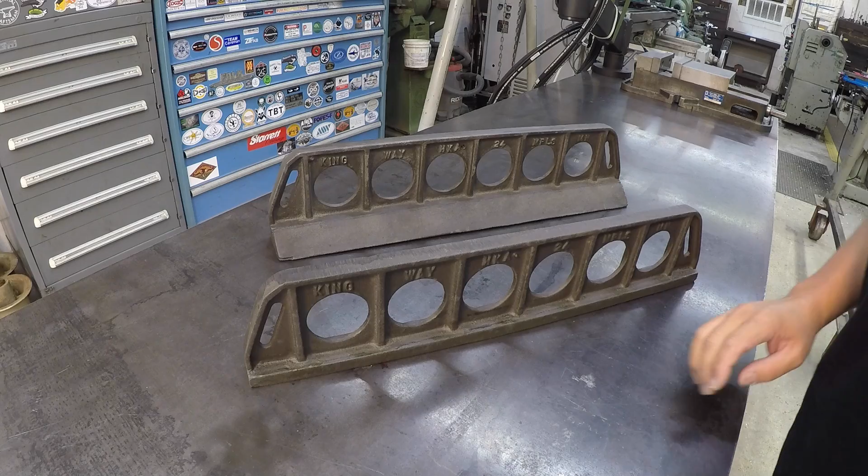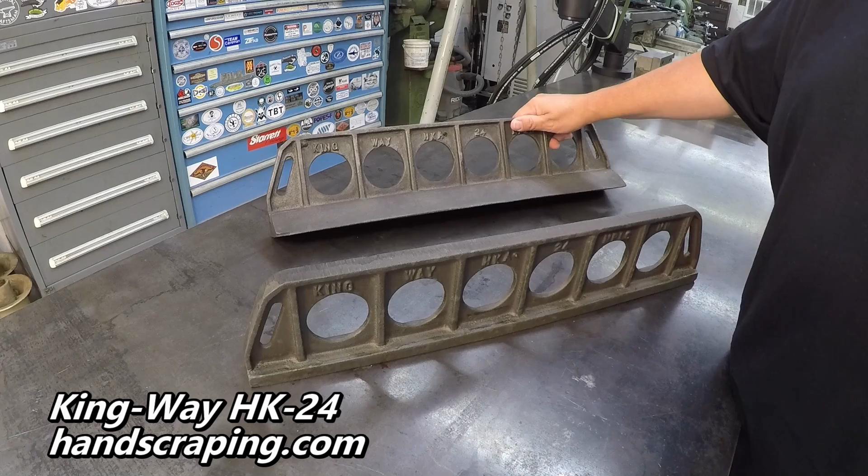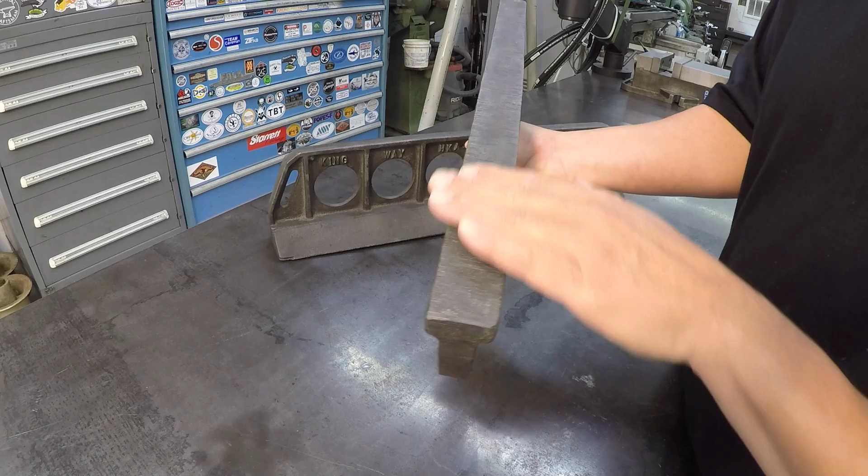Alright guys, today we're going to start machining one of our straight edges on the shaper, and we're going to start with this model right here, which would be the HK24. We're not going to do the one with the dovetail because I've got my tool head on the shaper trammed at perfectly 90 degrees up and down, and whenever we machine this one right here, I'm going to cut in both of the sides. So we'll do the top here, which will be actually the bottom. So we'll do this surface, and then we'll do these two side surfaces right there using the automatic down feed.

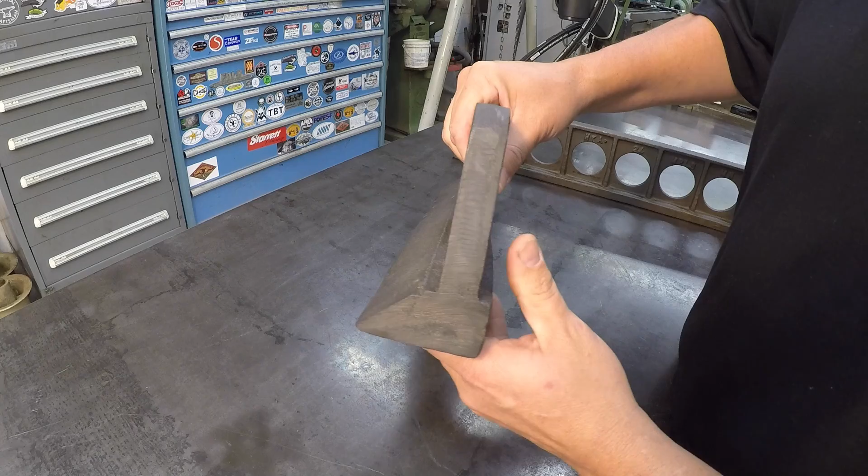So we'll do this one first, and then when we get this one completed, then I'll go to the HKA, which has the 45 degree dovetail right there. And then once we have this set up in the vise, we'll do this surface here, do this surface here, and then we'll move the tool head over at 45 degrees and cut this angle right there using the automatic down feed. All right, but this will be a separate video, and we're going to get started on this one.

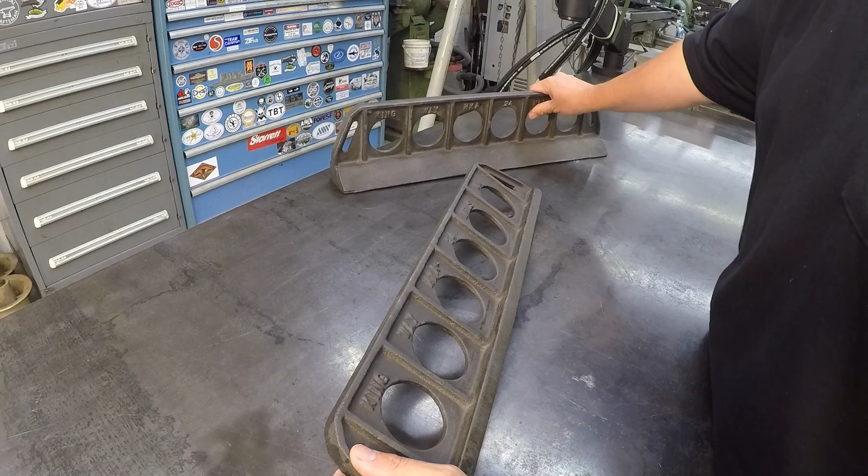The first thing we're going to do, the way that I want to do this, now I don't know if this is the preferred way or the right or the wrong way. I don't know. This is the way that I'm going to do it. These ribs right here are very, very close to being on a true plane. They did a good job with casting these. So I want to set this in the vise upside down to be able to do these surfaces here. But I want to be able to clamp this and not distort it, bend it whenever I'm clamping it.

So I'm going to start by cutting these ribs right here flat. I'm just going to clean them up. Not going to take a lot, but we're just going to clean them up so that they're machine true with each other, okay? And we'll do that first. Once we get both sides, we'll set it upside down in the vise, and then we'll do our main machine surface right there, okay? So let's go to the shaper. We got to tram in our vise, and then we'll start our cutting.

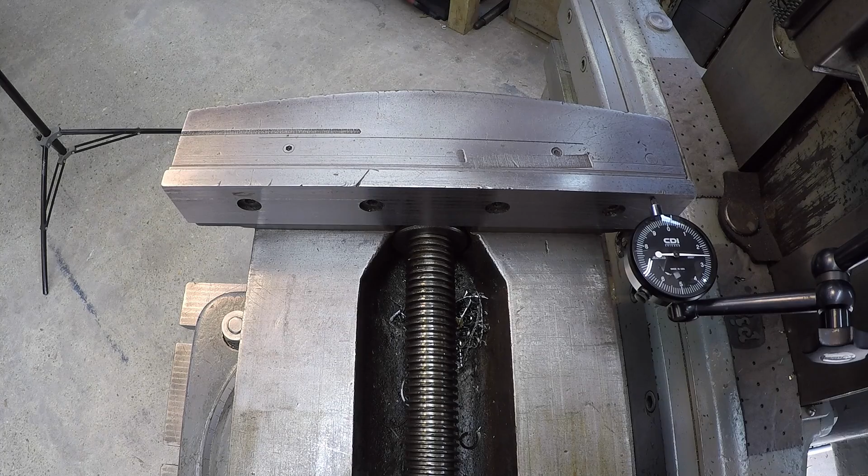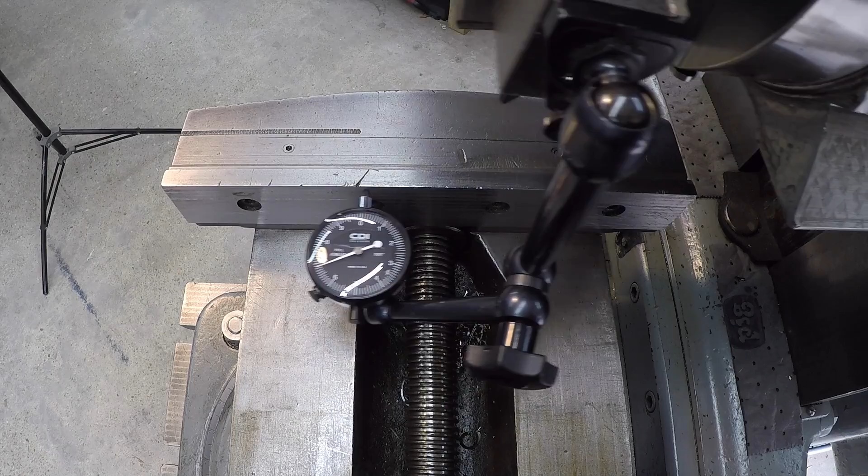All right, we're going to use our brand new Chicago dial indicator, test indicator, to tram in our vise. This wasn't trammed in last time I used it, so it'll be out a little bit. We got our Noga arm on here, and I'm going to use the fine adjust on the base here to get it adjusted up there close. I've already got the stroke preset there, so let's run her down and see what it's looking like. Looks like we got a good 5, almost 6 thousandths out.

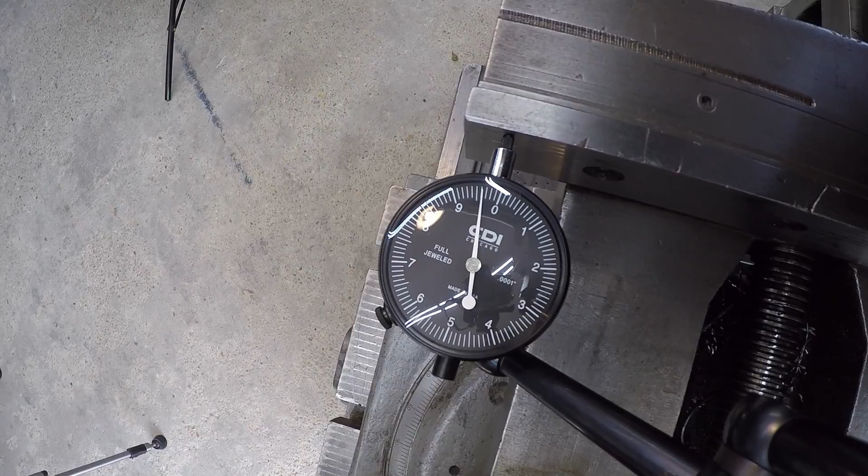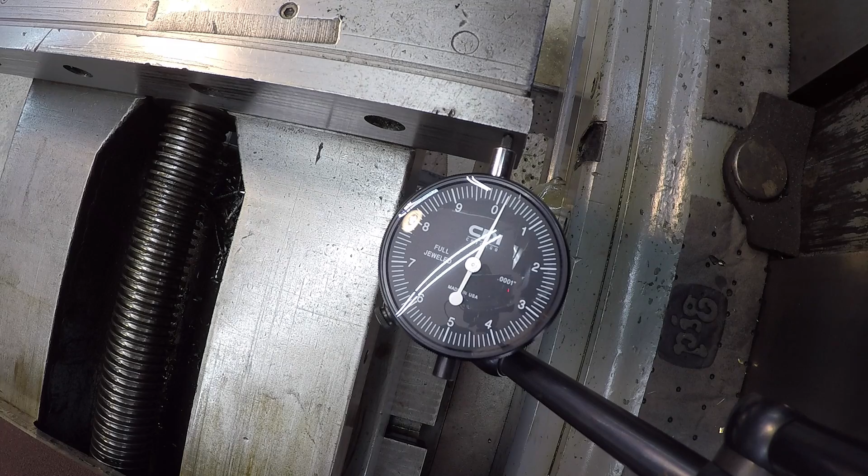You can tell the jaw isn't completely flat there. We got a little bit of a dip there in the middle of it. Looking pretty good though. We'll snug them down and see where it's at. All right. Looks like we're going to be within a half a thousandth from end to end right there, with a little bit of waviness in the middle of the jaw. So I'd say we're trammed in good enough for where we need to be. So ready to start setting it up.

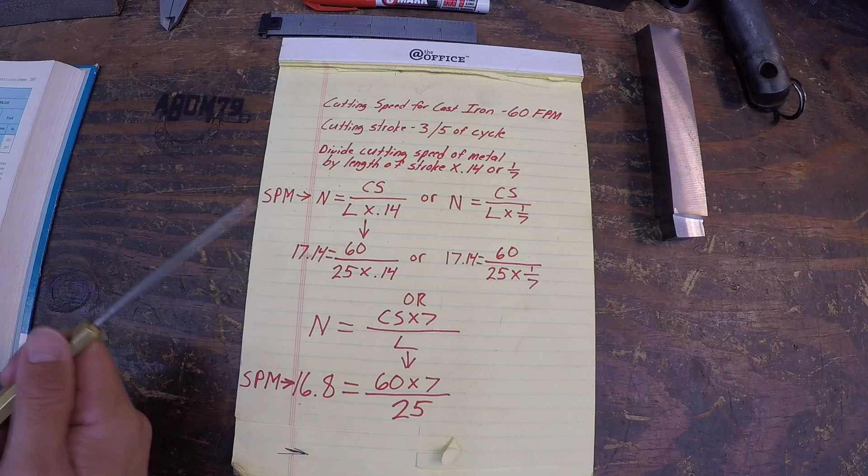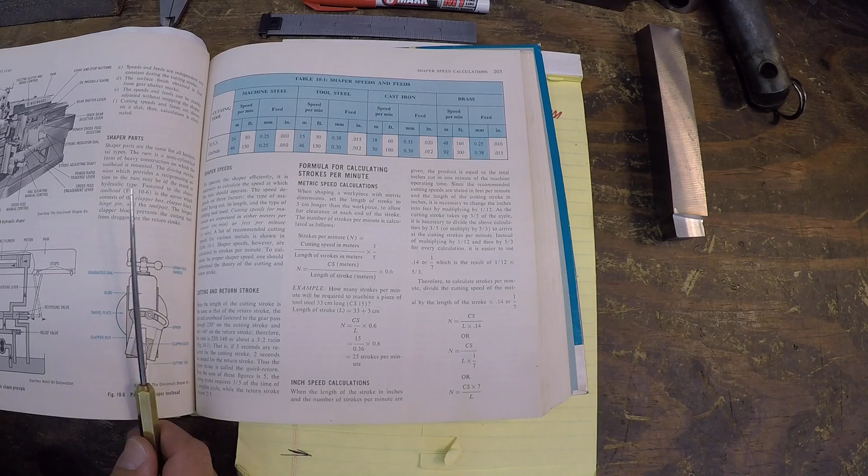I wanted to show you guys how I come up with the proper feed that we're going to be using to be cutting this cast iron, which is going to be 17 strokes a minute right here, okay? And this is the formula. I just went ahead and wrote it out so it's a little bit easier to see on camera. And this is all stuff that I'm getting straight out of my book right here, okay? This chapter goes over shapers. And, I'm sorry, not feeds, but the cutting speeds for shapers are actually given in strokes per minute.

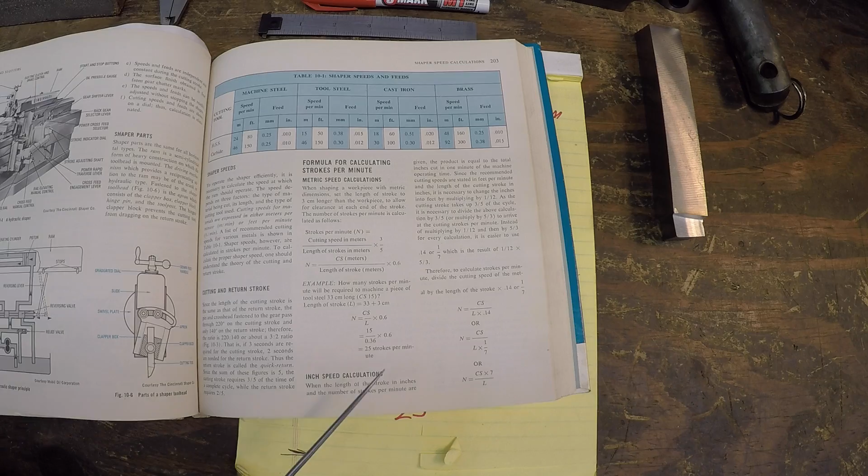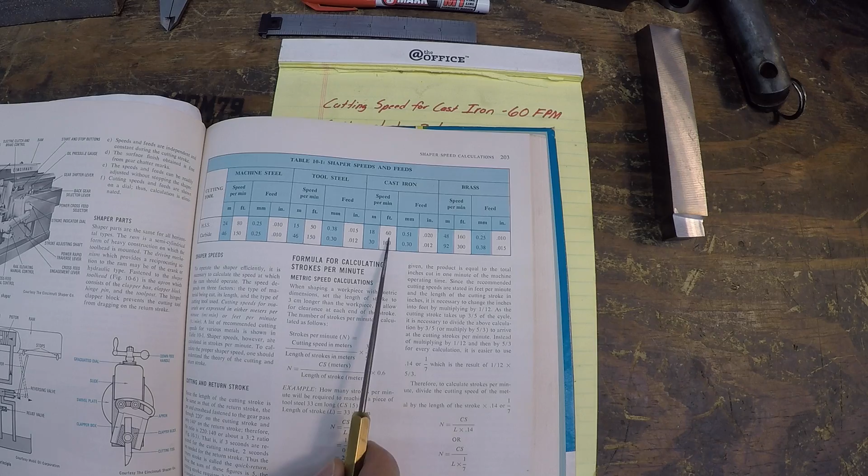Okay, so this chart right here gives you your shaper speeds and feeds in feet per minute. So we're going to be cutting cast iron, so it recommends a surface speed of 60 feet per minute using a high-speed steel. All right, so 60 is our known right there. We know that 60 feet per minute. And we also know that our cutting length is going to be 25 inches because we want a little bit extra length for our overhang, for our return stroke, whenever we go past our workpiece there.

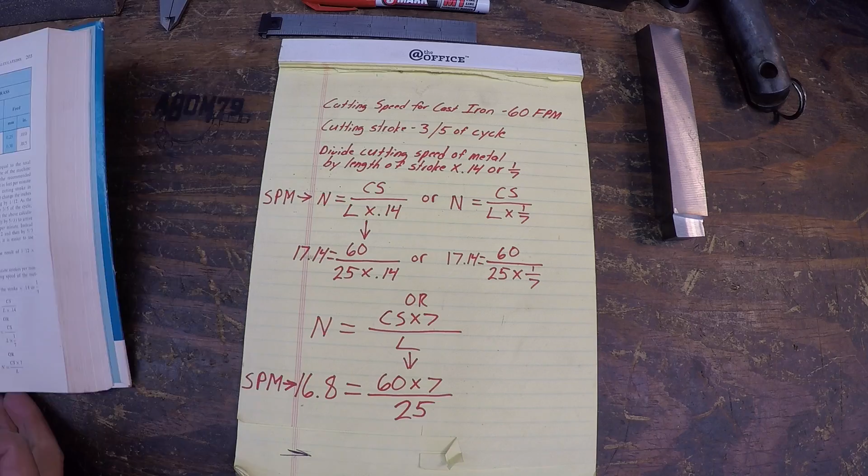So for a shaper, you have to convert it, and it all explains it in this right here. You have to convert it from feet per minute to inches per minute. And the other thing you have to remember is your cutting stroke for a shaper is only 3/5 of the cycle. So part of this formula is breaking that down into inches per minute and then 3/5 of the cycle. All right, so this is the formula right here, and it's just giving you the example. So your cutting speed is divided by your length times 0.14.

This right here just shows you the same thing. Cutting speed divided by length times 1 divided by 7. 1 divided by 7 being the same thing right here, 0.14. Okay, so if you drop down here, you see that gives you your total. 17.14 would be your strokes per minute if you use this formula right here to get your proper strokes per minute.

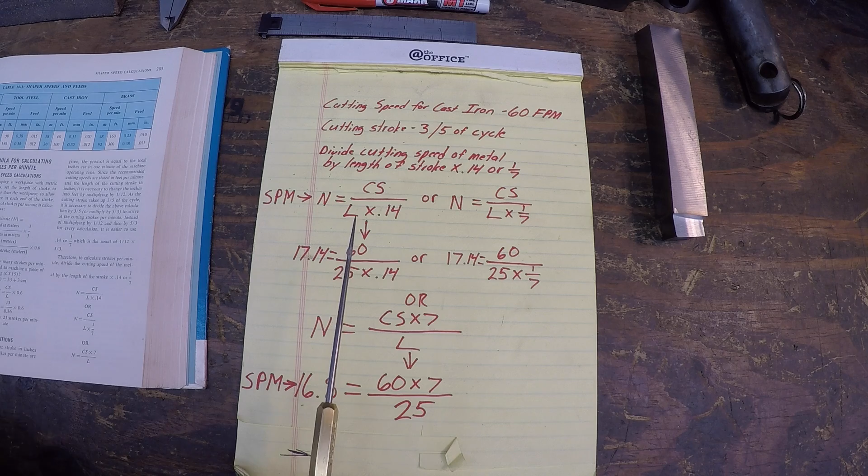Okay, to further simplify the formula to figure out what your strokes per minute would be, instead of using the length times 0.14 on the formula here, if you'll just go cutting speed times 7 divided by the length of your stroke, which in our case is going to be 25, that'll give you your strokes per minute. And you see how close that is. 17.14, 16.8. You round that off, you're at 17 strokes a minute.

So this is the easiest formula to remember for your shaper right there, is your feet per minute for your given material, whichever that's going to be. In our case it's going to be cast iron at 60. So your feet per minute times 7 divided by your stroke length will give you your strokes per minute.

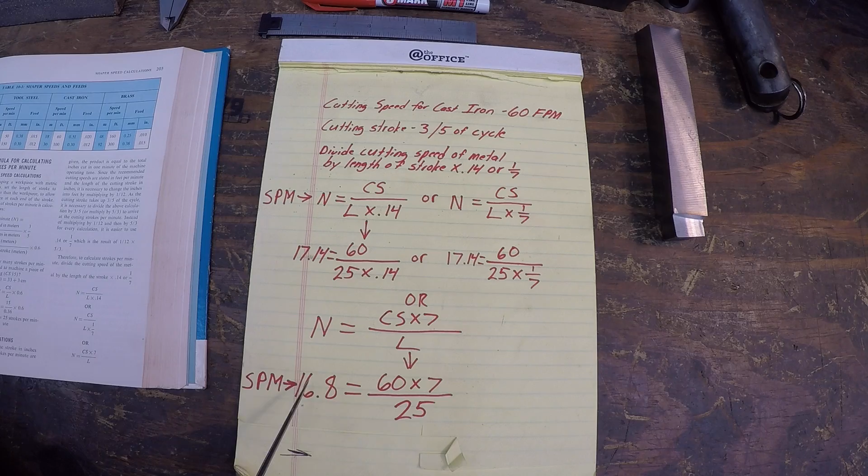All right, all that can be found right here, and this is my favorite book, Technology of Machine Tools. But there's several books out there that have really good chapters on shapers and planers, and it gives you all the formulas right here that you need to know.

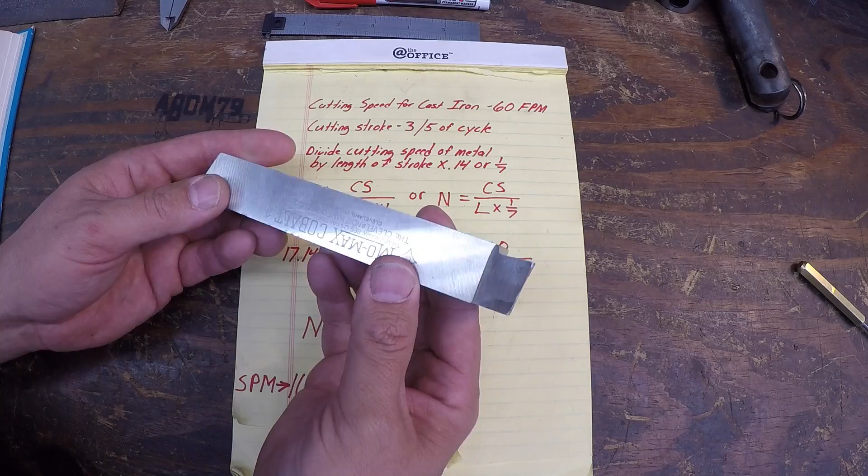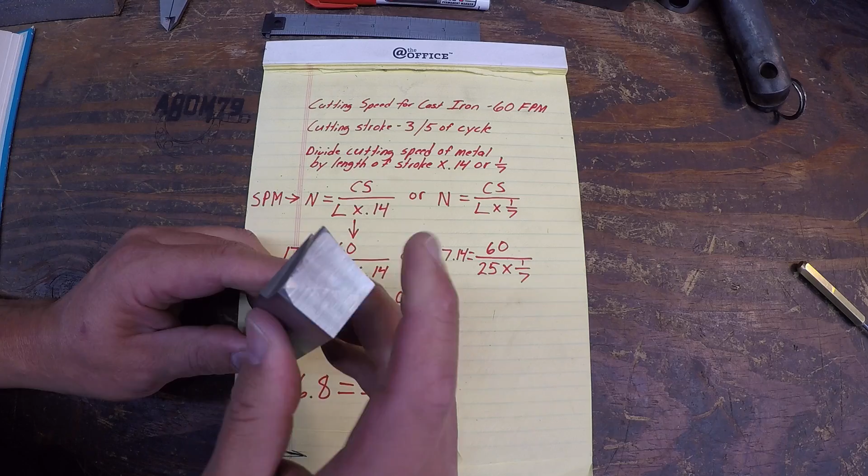While I got you here, I'll show you the tool bit that we're going to be using to make the cut. I've already touched it up. This is a piece of Mo-Max Cobalt 1-inch square, and I did touch it up on the grinder, touched the top of it, and I've rehoned it on my tri-stone over there. We got a nice sharply honed radius and cutting edge, and I changed up the angle so that I can position the tool so that our cutting edge here is 90 degrees to the direction of feed right there.

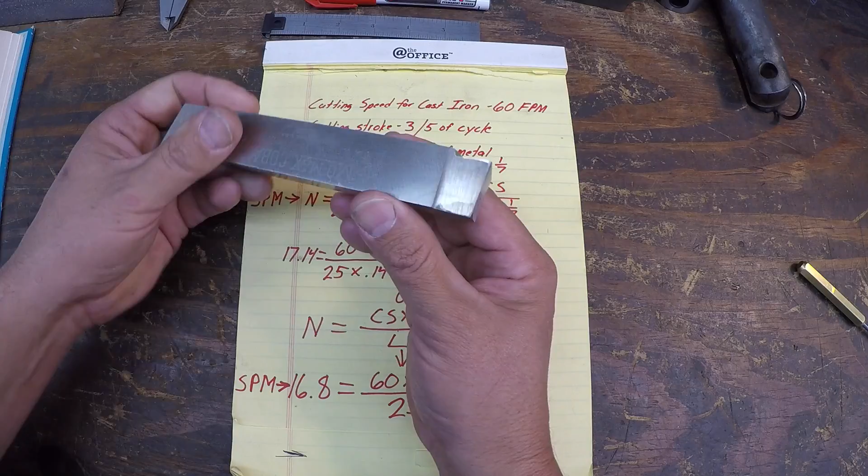I've been working on getting the vise set up here, and let me explain my setup. I've got my sandpaper here, my emery cloth, taped to each side of the jaws right here, and this is providing the best way to hold this rough casting in there. While setting this up, I've already tried the little bar, or let's say welding rod, aluminum bar on one side, and any other way that I've tried to set this up, even with a little ball bearing that I can put in there that applies pressure just to one point.

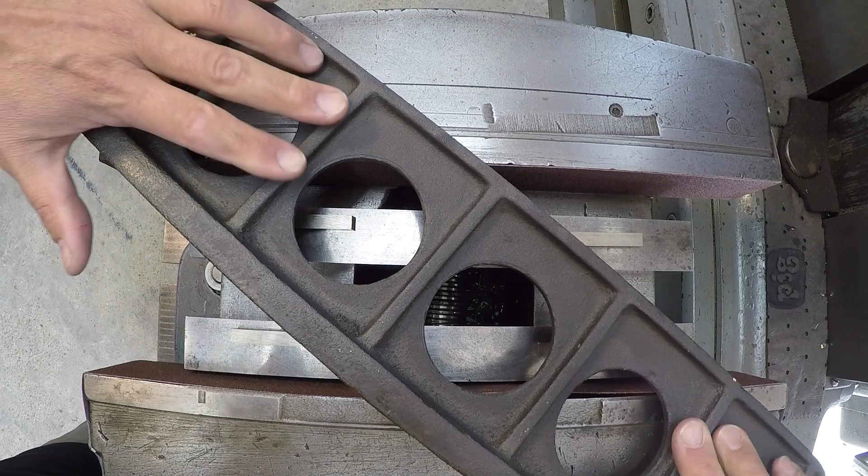Any other way I've done it has tried to kick it up whenever I tighten the jaws up, and I want it to stay flat on these ribs here. When I lay it down, I want it to be flat on the ribs because these are all in the same plane right there. I don't want it to kick one way or the other. And then of course these sides are not very flat. So this technique always works really well for rough castings, just taping it in there.

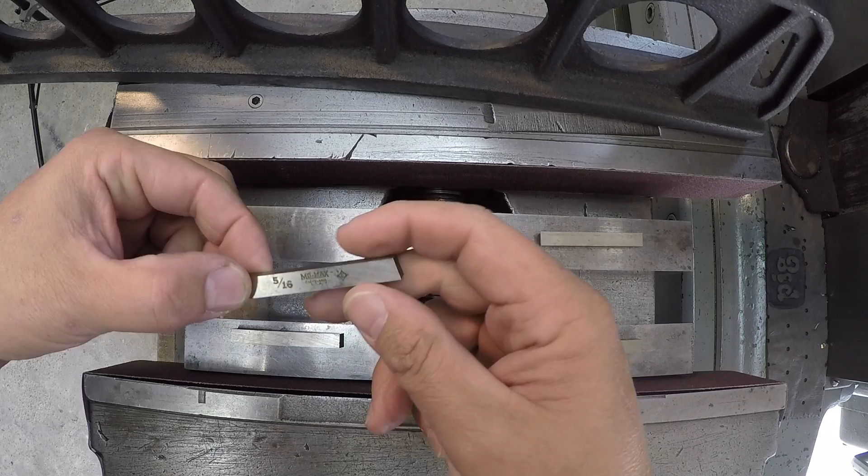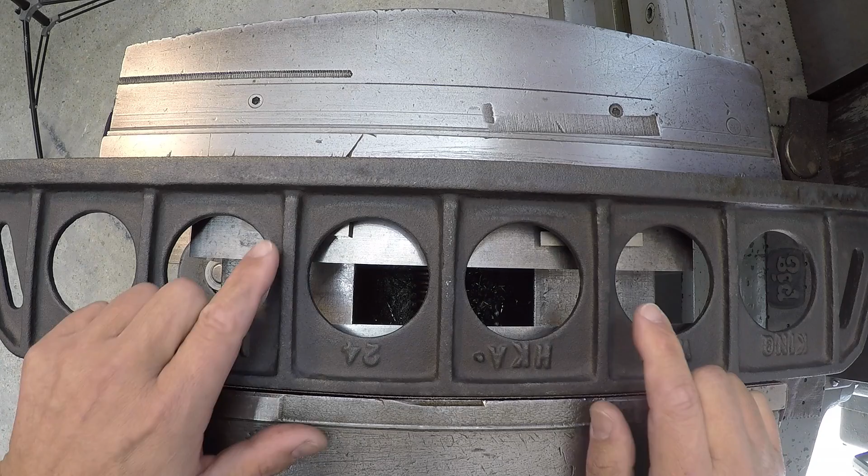So I got two parallels, and these are 5/16 tool bits, and I've mic'd these, and all four of these are within a 1/2 thousandth of being the same height. So that's going to be good enough for what we're doing right here with this piece of cast iron. So I've got them all ready to go. So let's set this down in there where I had it evenly. We're just kind of eyeballing these holes right here, even with the end of the vise. And so we're setting on these ribs right here.

All right, and I've got it up just enough now so that we can come across here and cut, and we'll come all the way over to right in here. All right, so once we tighten this up, I'm snugging it up now. Once I snug that up, it's not twisting the straight edge. It's not kicking it one way or the other. It's still flat on all four of the tool bits there in the parallels. There's a shot from down there so you can kind of see what I'm talking about.

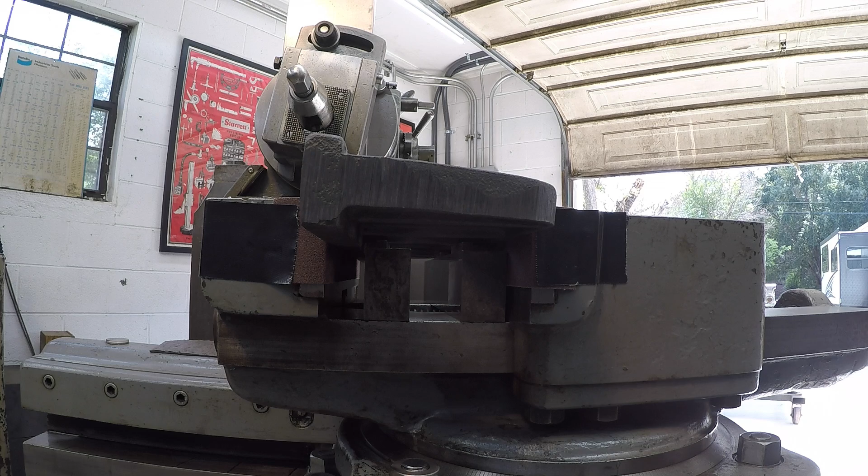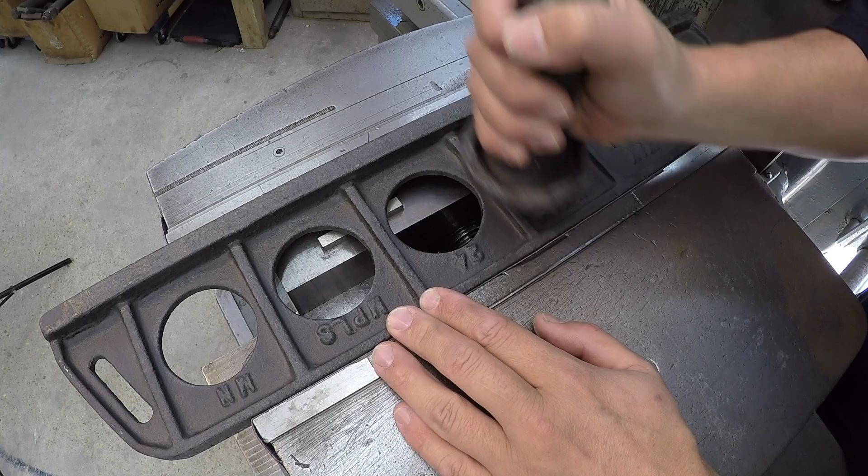It's snugged up, but I will take my lead and just gently tap it so that it is seated down there. Yep. No need hitting in the back. It tries to kick it up some, so just tapping the front, just making sure that it's seated on all four of the tool bits there.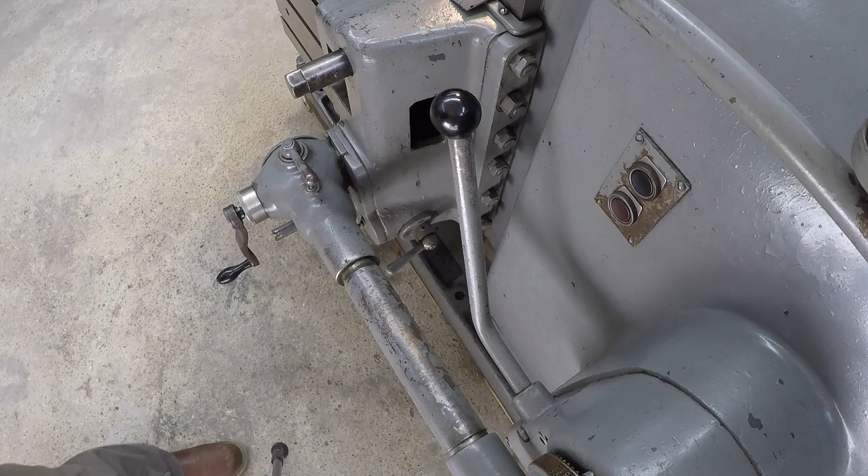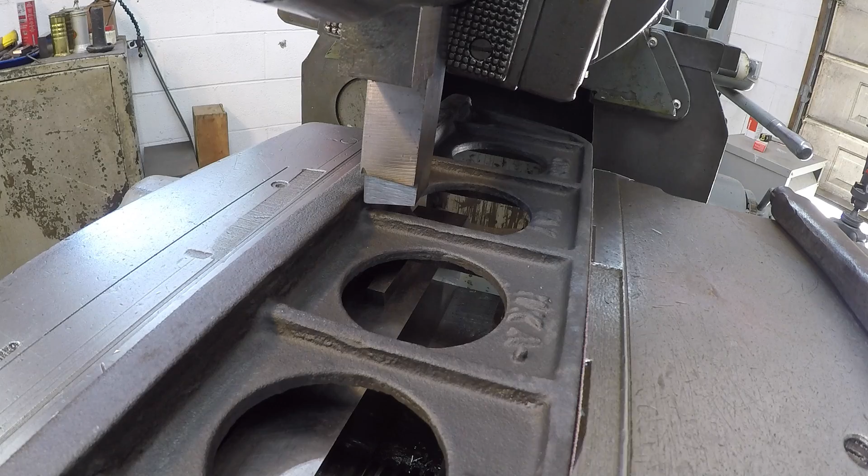I'm just getting my tool set here to the angle of this area right here. I don't know if I'm going to be cutting into that. It might just come right up next to it, but I wanted to get it lined up anyway. So I just brought it over right up against it, and I'm just looking down this right here, and the edge of that tool bit is lined right up on it. Okay, so we should be good to go there.

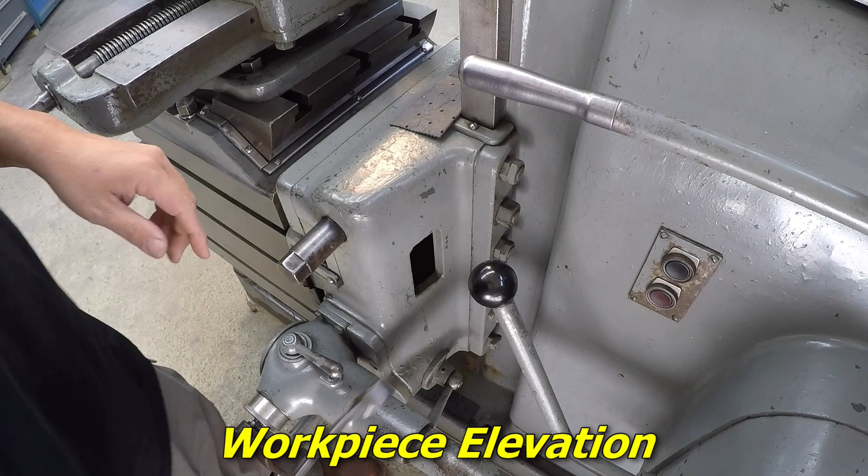Just got to tighten my lantern good. Once you get your tool set where you want, you always got to remember to tighten the table here, and the support on the front as well. You got this one right here, but this one doesn't. On my shaper, you see how it just spins? It'll tighten up, but I believe the cam is worn out. It never really gets fully tight. So I have to go around the other side and actually tighten the nut over there to tighten up this way.

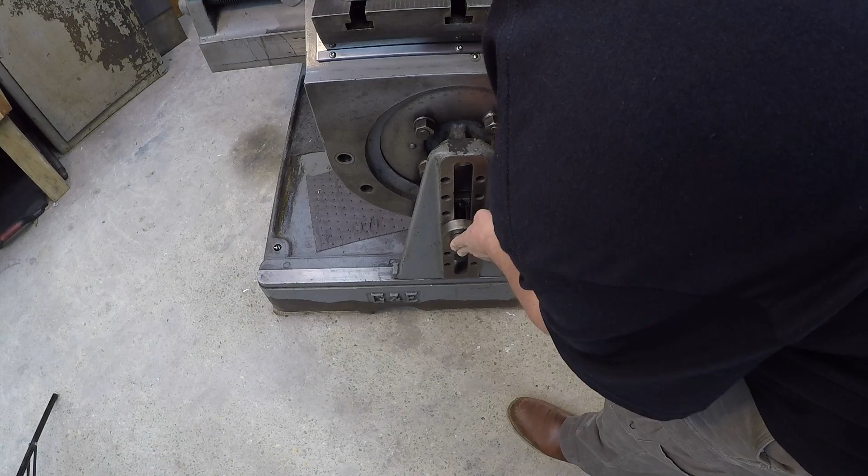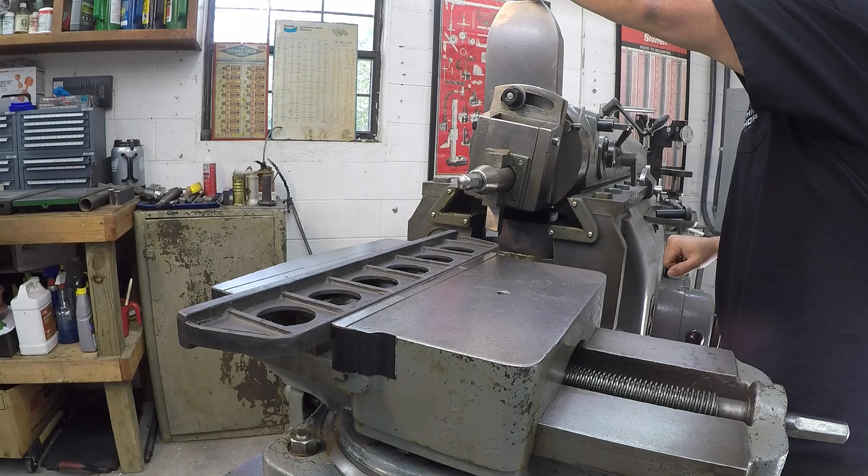I know that looks really close there, but I do have clearance, so we'll miss it. Trying to get them all evenly cutting, touching all except for here. Just taking 2 thousandths a pass here. I was hoping maybe we could get it in one cut. Go ahead and come across it with it right there.

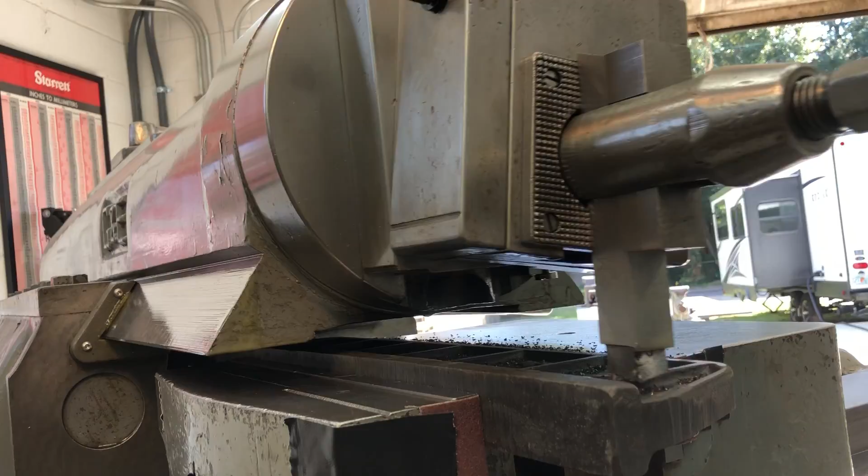Just gonna try to sneak up on that shoulder there. I don't know how true it'll be, so I don't want to take some massive cut across it. Right there. That's it. Got a few spots there along that shoulder that it actually touched it.

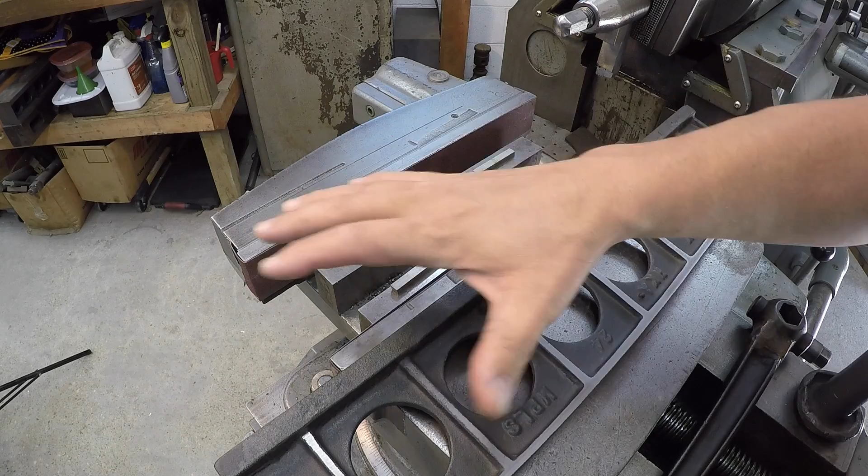I think our tool did a good job. It's got a nice smooth cut to it. It looks good. And for the most part, it cleaned up everything except for the very end of it, the very last rib. It doesn't matter, because when we clamp it, it's only going to be these right here. We'll get our vacuum and clean this all up and flip it over. All right, we got everything clean, ready to go back in there on this side that we just cut here. Looks good. I'm happy with that.

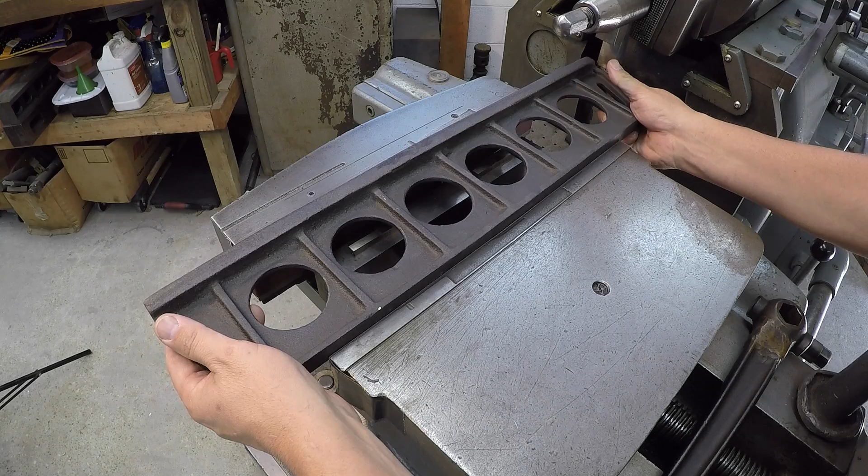Just getting those holes kind of lined up here where we had it. Tighten up our vise. Alright, we're going to give our part a little tap. Sounded like it was solid there. Tight, tight. That one's tight. All four of our tool bits are tight, so that means I'm seated perfectly flat there. Awesome.

I did the same thing on this side. I just put the tool about in the middle, and we had just started touching. I moved down approximately 10 thousandths to where it was touching all the ribs. We've got a little bit of a dip in the middle on this side though. Getting ready to sneak up on that shoulder there.

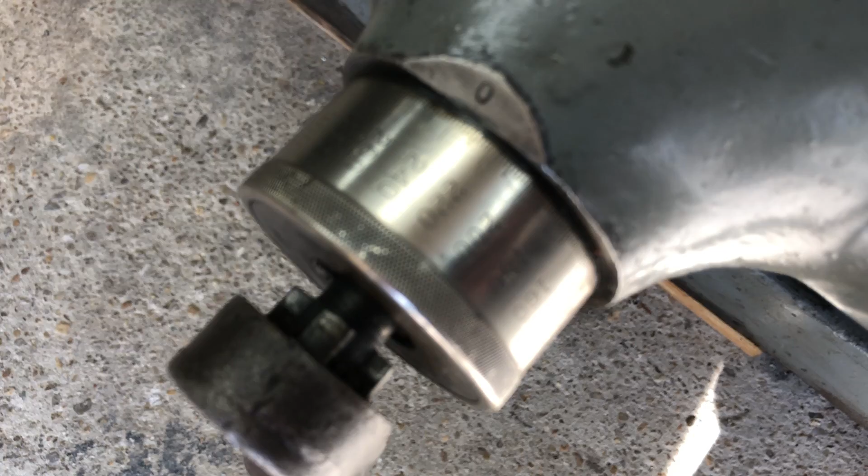We finished our other cleanup cut there. Turned out real nice. You see we got that one little hollow right in there, which is okay, but we cleaned up all the way across there. So we are ready to move on to the next phase.

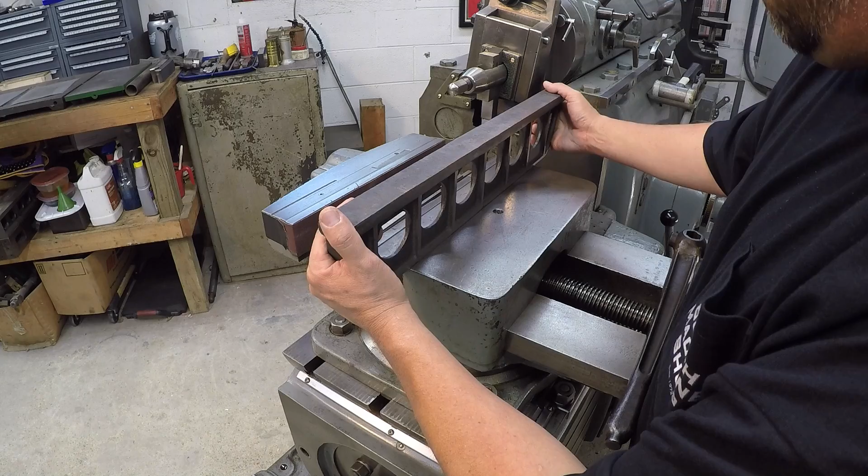So let's go ahead and set up. We'll set it up in the vise like this. Clamp it in there like so, and we'll go ahead and start working on our main surfaces there that we're trying to get to.

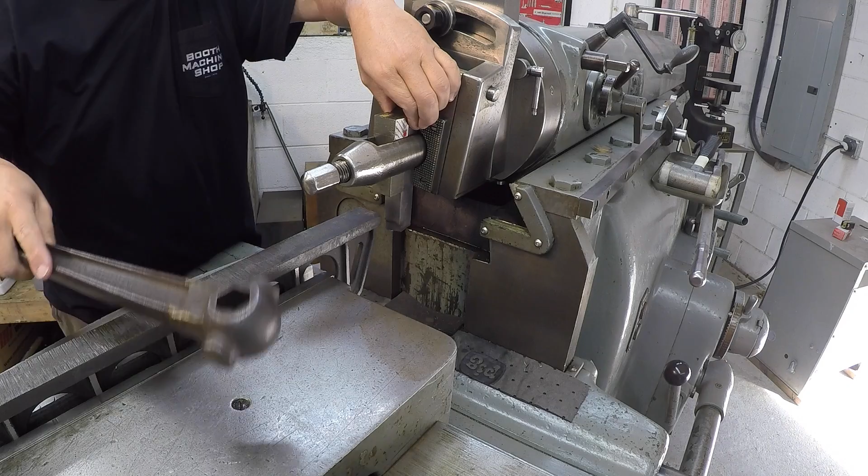For the top surface, we'll just go ahead and rough it in using this tool here. I'm just going to bring the tool up. We'll get it set there, and then whenever I go to finish this surface right there, I want to use my nice finishing tool, my square nose tool, where we hone it in. So we'll do that technique once we get there.

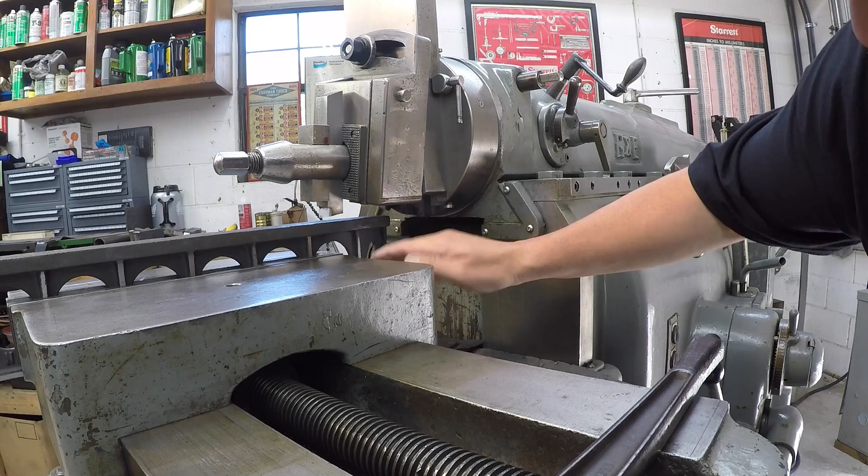This is something that I always try to pay attention to. Now, I didn't run it forward, I just crept it forward to see what my clearance is. So I definitely got to bring the workpiece down, because we're going to hit the tool head if I go any more forward with that. So we'll bring the work down, and then bring the tool down so that we clear the ram here.

Got it touching on that end. All right, we touched on that end now. Touch, and we got 4 places. All right, so we're ready to set our depth and make a cut. Fall off our corner there so it don't chip away. Alright, here we go. I got it set up for a 40 thousandths step over. Move across there a little bit faster.

Alright, so that was 20 thousandths, but we're not cleaning up. I need to take some more. I'd like to clean it all up in one pass. Just getting the tool set next to the edge again. That's 40 thousandths depth, 40 thousandths step over.

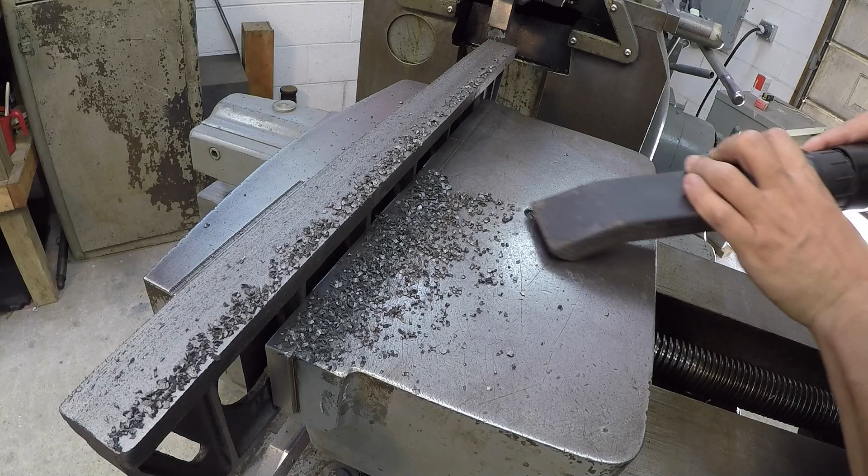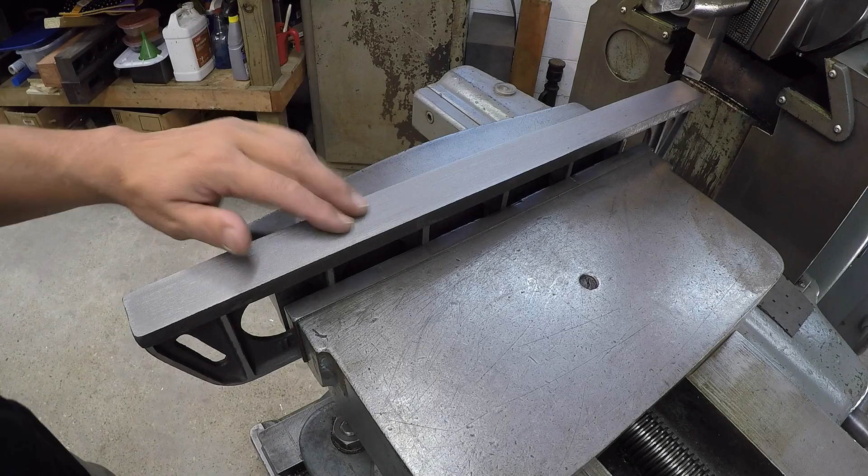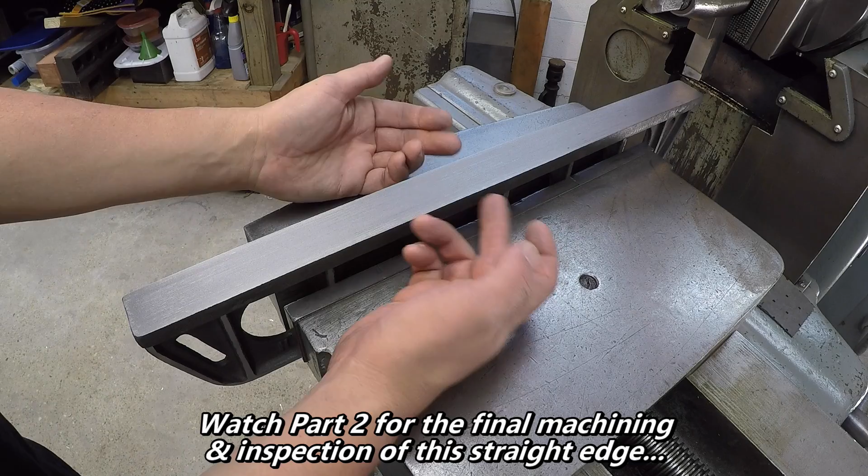That one roughing pass looks good. There's two little tiny spots in there, but they're not really big enough or deep enough to worry about. I'm thinking maybe the finish pass is going to clean that up. So we're going to move on, and we're going to cut the two sides in. Once we cut the two sides in, then we're going to focus on finishing this right here.